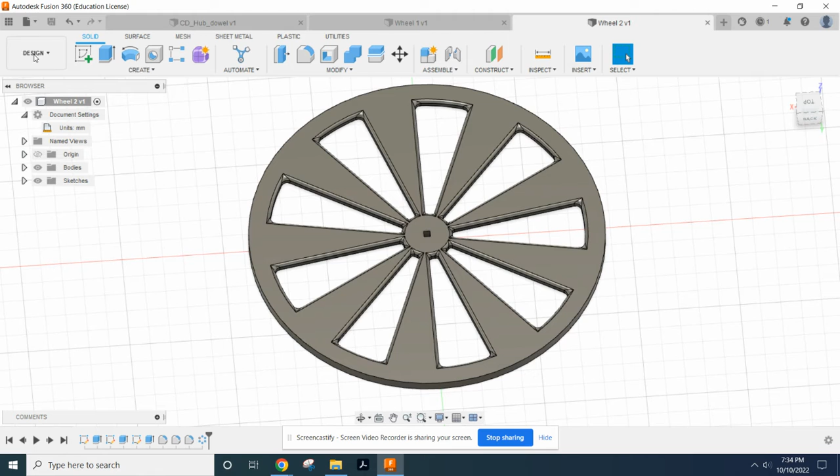Let's go ahead and start this thing. I'm going to go File, New Design to create a new design. It will still be adding these things in my POE folder. You can see I've made a couple of attempts there, even made a screencast before I found out I didn't have the sound on. It's been a good day.

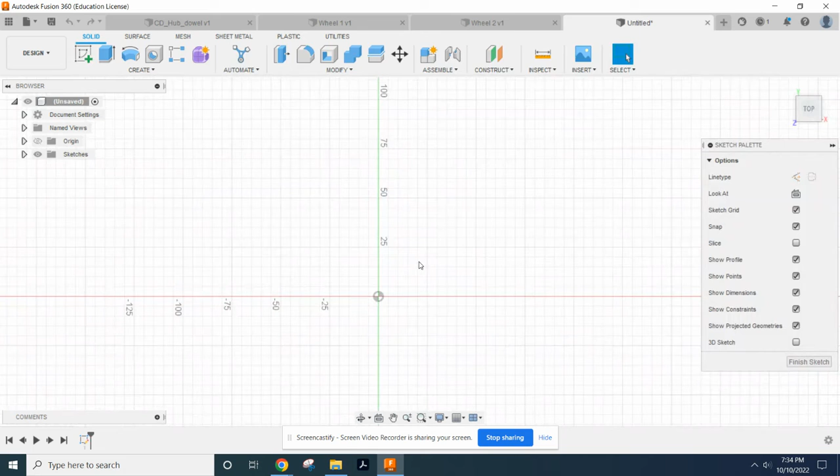So I'm going to start a new sketch. Click on that XY plane because I'm happy and comfortable in my XY land. And I'm going to select that circle because I want a round wheel. I'm not very creative like that.

I want my round wheel to be ish 175 millimeters across. Now make sure you are working in millimeters - you can come up here to this little tab and make sure your units are millimeters. Otherwise it will not be dimensionally accurate on my 3D printers.

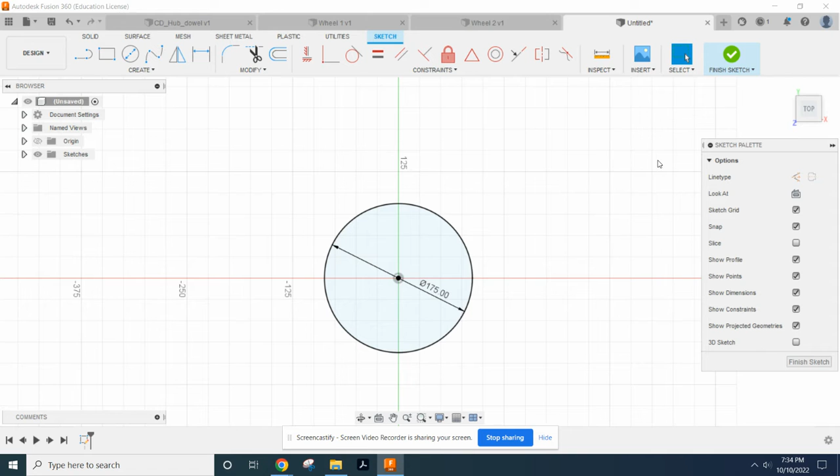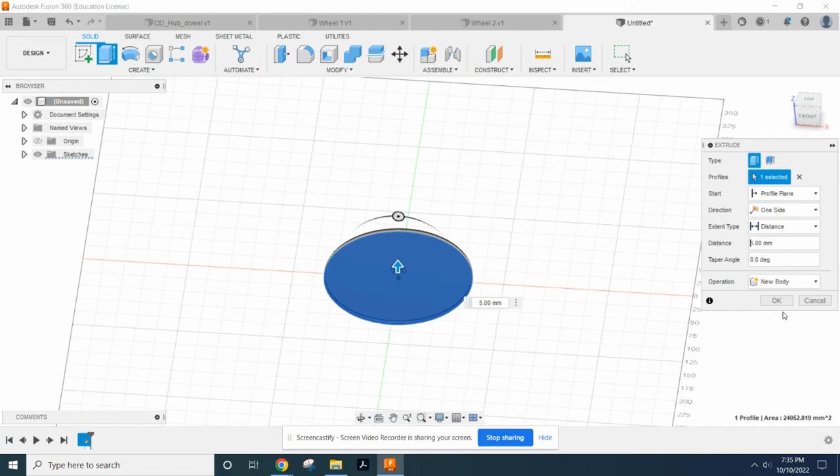I'm going to finish the sketch and then come up here to the extrude button. I'm going to select that sketch to extrude, and yeah, that one. Pull the arrow up a skosh - I don't want it to be 25, I want it to be like 5. Creating a new body, I like it. Let's do this. All right, so that's boring.

You got a disc, congratulations. All right, so now we're going to create a new sketch here, and this is where we're going to have our axle hole going through.

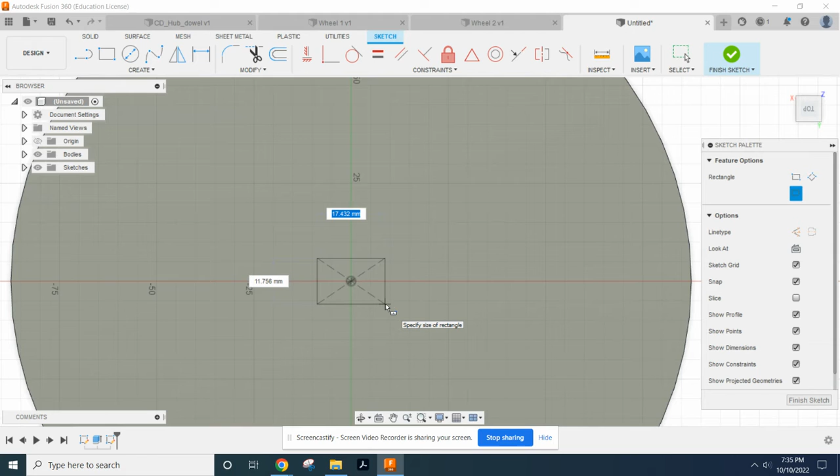So for this one, I'm going to create a square axle that will fit our VEX components. I did that center rectangle right there - yeah, that one. So what I can do is select the origin again, that center point, and now I'm going to type in 0.127 inches. I'm picking that number because the VEX parts are 1/8 of an inch by 1/8 of an inch, which is 125. I want to make sure I can get the thing through there, and a little bit of hot glue will definitely hold it in place.

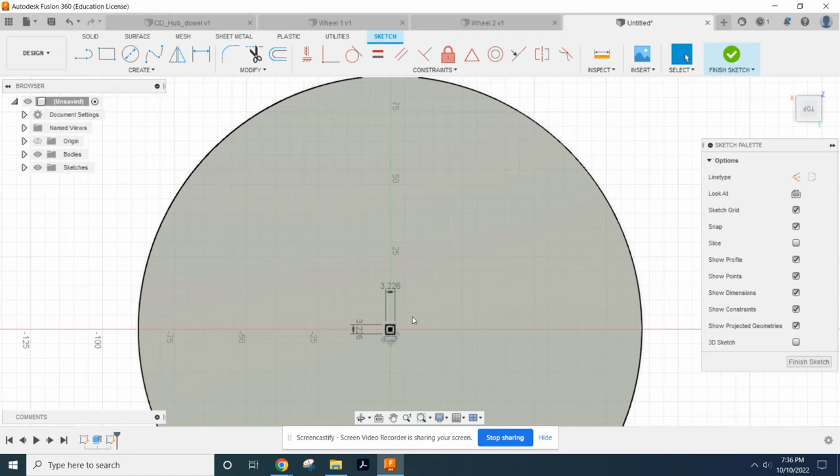So then I'm going to hit tab and type 0.127 inches again. It's going to recognize that I want 0.127 inches, but it will happily convert that to millimeters for me since we're working in millimeters. I'm going to finish the sketch and then extrude that hole again.

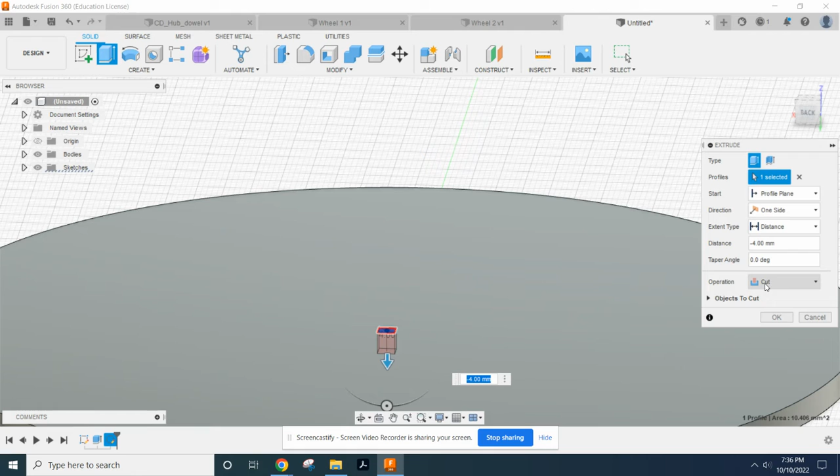So you got to be careful what you're clicking on. Over here, the disk is highlighted, now the hole is highlighted, that square that I want. It's easiest if I hold shift and use your center mouse, and you can see as I take it up, this little arrow thing - if I pull that down, it sets this to cut. Instead of extending it for a distance, I want it to be all the way through the object. That way, regardless of how thick I make this object, if I come back later and change that, that hole will always go all the way through it.

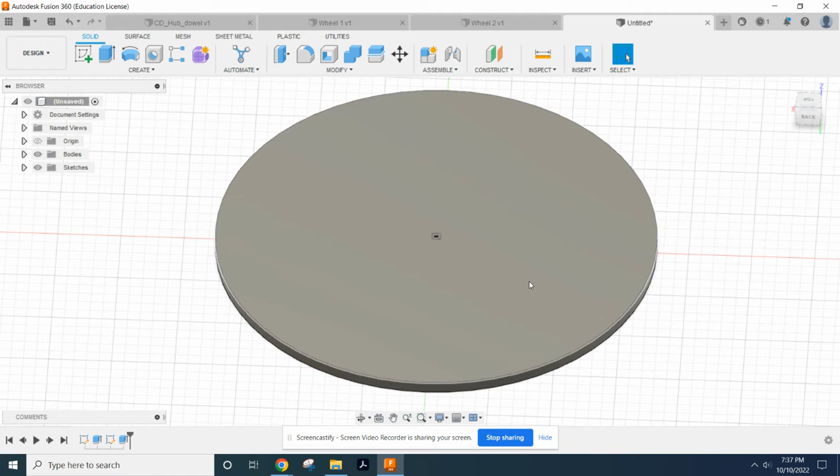Okay, happy days. Now what I want to do is put like a pattern going around this thing that is actually going to be like the spokes of my wheels. So I need to figure out what kind of cutouts I want. First thing I'm going to do is set up an outside perimeter.

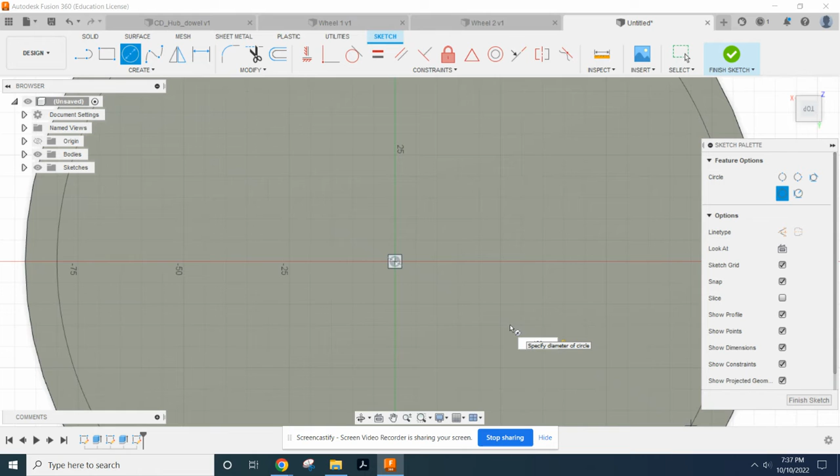Picked my circle, selecting the origin of this thing again. And what did I say, 175? I want to go 160 millimeters. So that means I'm going to have a 15 millimeter rim around the outside. Cool, got it. Now on the inner circle, I want that to be, we'll go with 25 millimeters. Cool, now I got that.

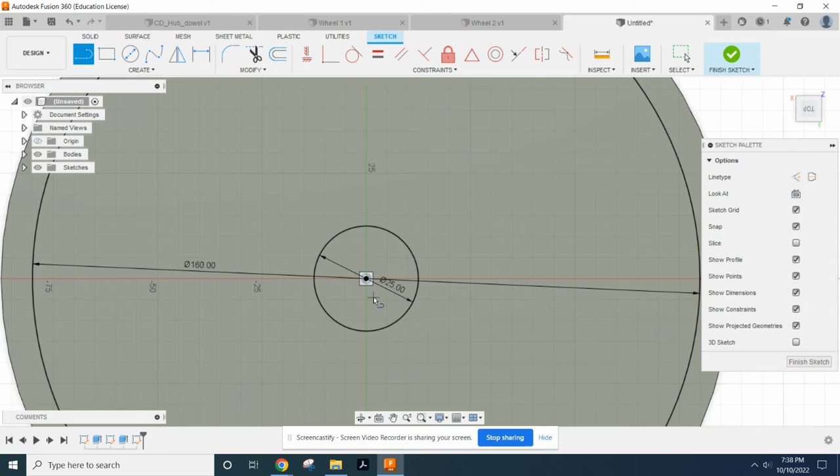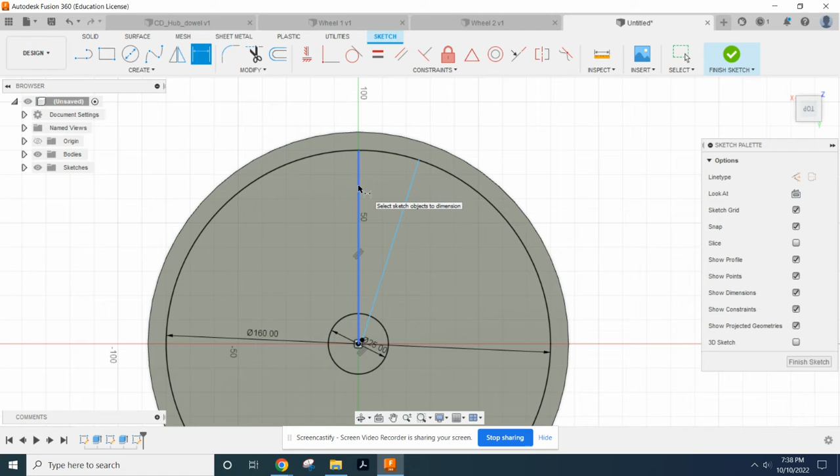Now what I want to do is come up here and get my line tool. I want to come clicking from the origin, go straight up, and click right there. Okay, I want to do that again, coming over here, and make sure I'm clicking when I get that little blue X there. Now, what I want to do is dimension the arc, the distance between those two.

I'm going to go ahead and I want it to be a 20-degree angle. You can put it at 15, 20 - I just recommend you make sure it divides into 360 degrees evenly, because we're going to put an array or a circular pattern around that thing.

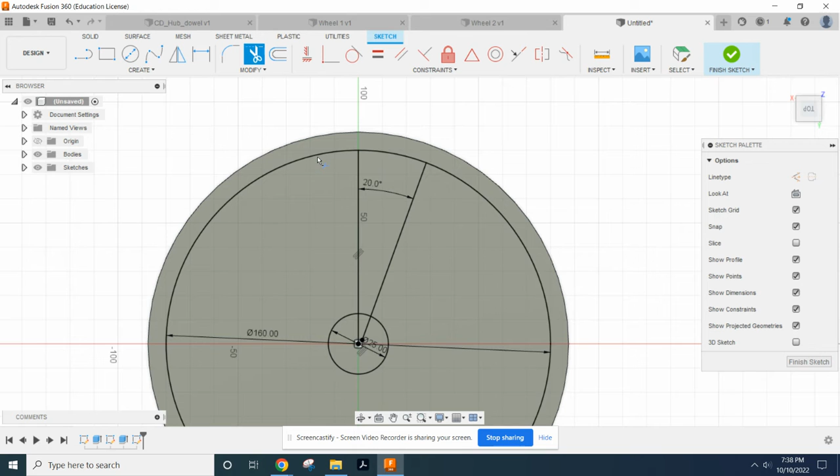I now want to modify this because I don't want this outer part of the circle. I don't need all of these lines in their full extent. So I'm just going to start clipping away and cutting away lines I don't need and don't want. Okay, so now I'm left with this shape, right?

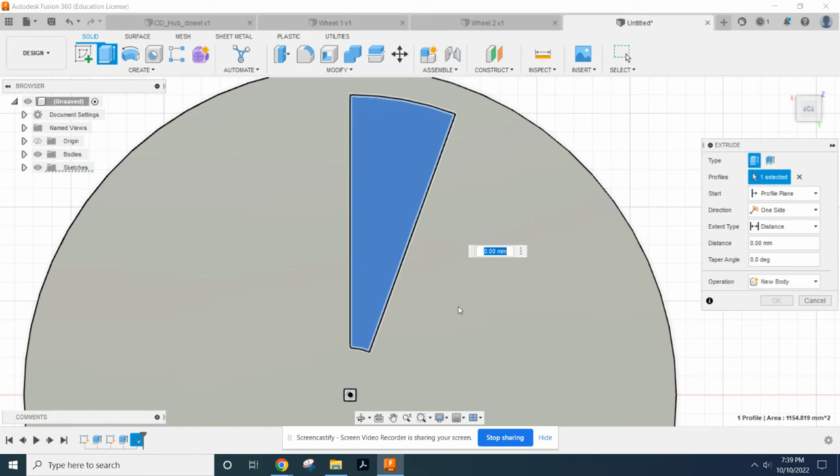Now I want to go ahead and extrude that. So I'm going to hit E and select that shape. Now, if you cannot select your shape, that means you did not make a closed shape, and you need to make sure your lines are actually intersecting where you think they are. But I'm going to go ahead and extrude that, and again, I'm going to cut that thing all the way through. Okay, looks good to me.

Let's do it. All right, now that's my original, right?

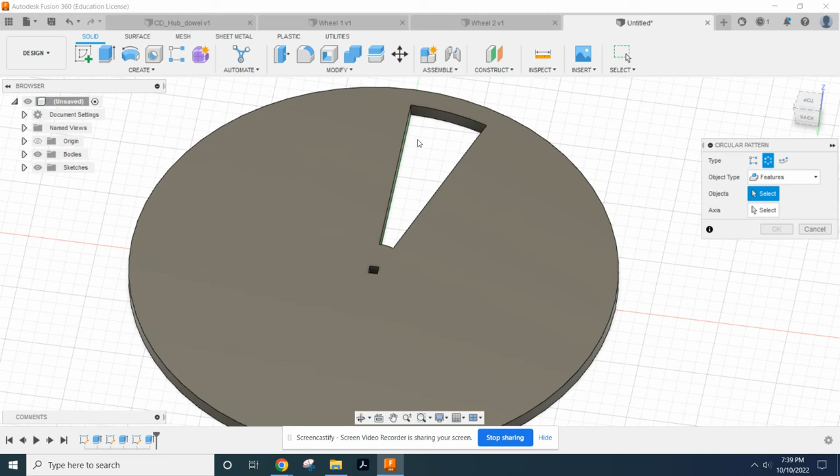So we're going to go ahead and make a pattern now, specifically a circular pattern. I want a circular pattern of a feature. We don't want a body because that would be the whole body, and we don't need a face because that would be just the face. I want the feature, and I want to make sure I'm carefully selecting the feature.

Now you got to select your axis. I select the axis of the whole disk, and immediately I get this preview. I can change the number of holes that are cut very easily. So let's see, 360 divides by 20, 18 times, so like 7 or 8. Yeah, I'll go with 9 holes, that should be good. And I'm going to click OK.

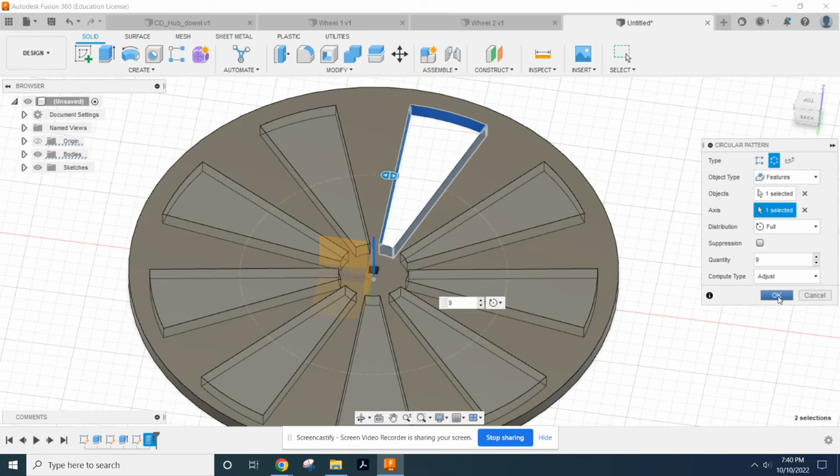And now I get that shape, which looks fairly decent. They're all spread around evenly. But then if you've ever 3D printed, you know that a 90-degree angle is a nice sharp angle, right?

So what I want to do is adjust my original one. You see how I just hovered over on my timeline to find the original feature? I'm going to modify this feature, so I'll click here and click fillet. I'm going to click all of the lines that represent the intersection of the sides of the hole and the top and bottom of it. So I'm just selecting, and then when I want to turn the thing, I'm holding shift and the center mouse button and dragging it around to get a good view of what I want to click on.

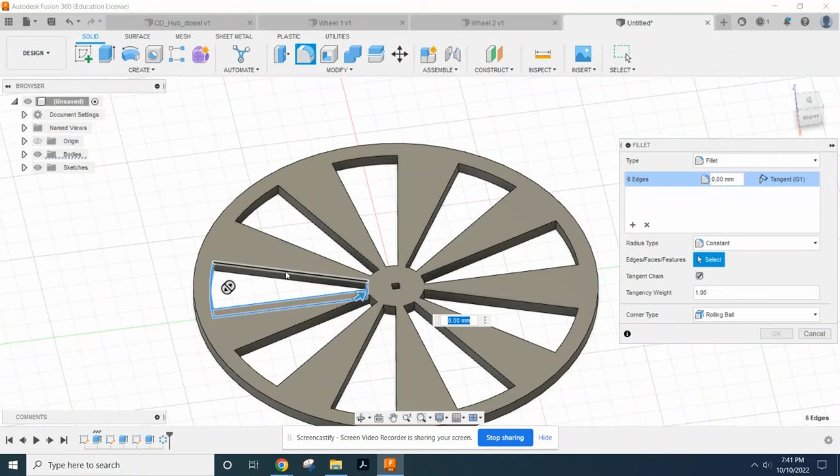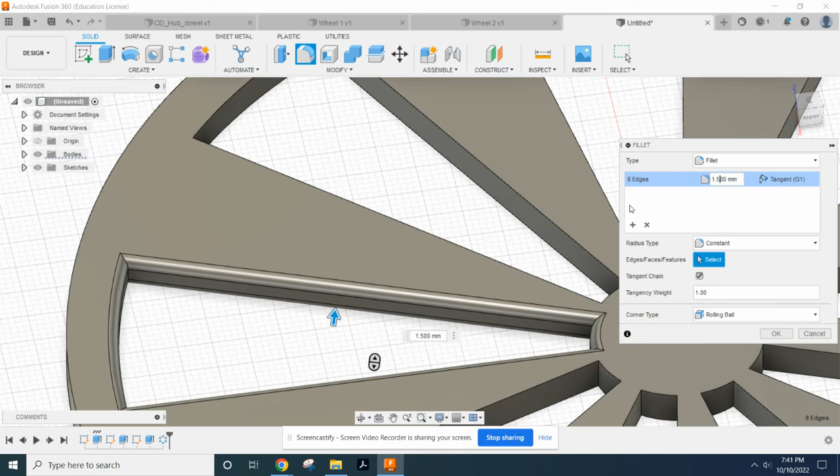Okay, so now I'm going to select a 2mm die fillet. Yeah, that looks good, that looks all right. Maybe I'll take it down to 1mm, maybe that'll look better. That's not bad. How about 1.5? There we go. That is gorgeous. You can pick whatever fillet size you want.

Whatever looks nice, until it pops up with error messages. And it will pop up with error messages.

So I also want to do these edges. That one, pan around by holding shift and the center mouse. And that one. Now I'm going to say let's do a 3mm. Looks great. Maybe we'll do a 4mm. Ooh, see how it says no? Go back to 3. All right, cool.

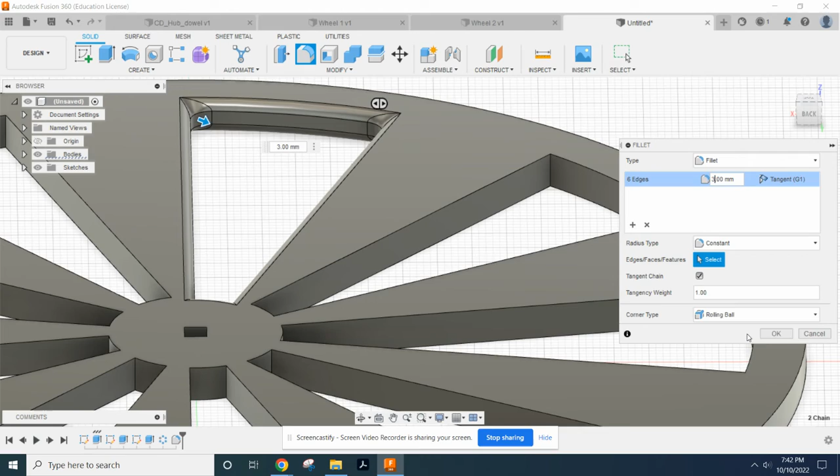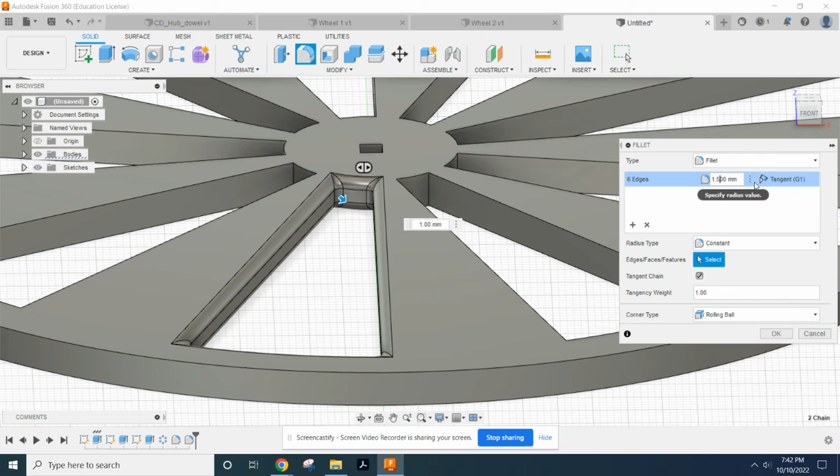And now I'm going to do this inner one. All right, fillet that thing again. Select, hold shift, center mouse button, click that one again with my right click. Now I want to go ahead and figure out what looks nice there. 1mm, 1.5mm, I like that 1.5. Click OK.

All right, so here's the thing. That only did it to that one, right? I want it to go to the rest of them. This is what this timeline is really good for down here. I want to go ahead and select that pattern and drag it over here. Okay, so all of my fillets have now occurred before the pattern.

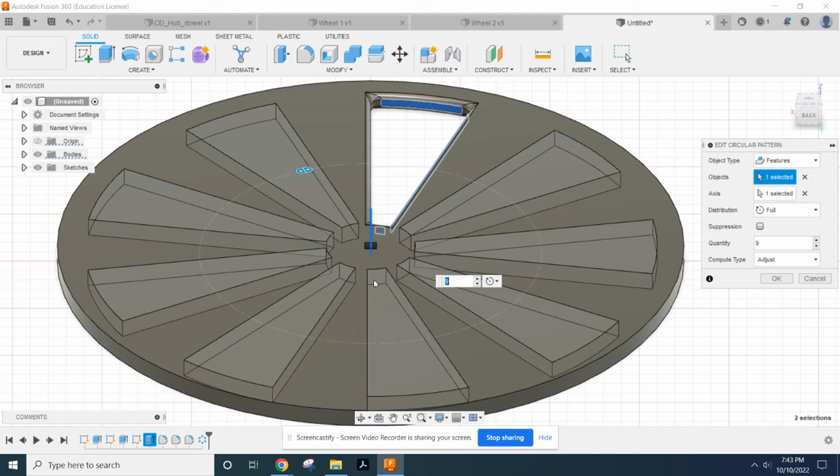And so then I'm going to right click on this pattern and say edit circular pattern. Then I'm going to hold control and select here, here, and here. And you see how it changed the preview? Because now instead of having one object selected, I selected 4. And now I can click OK.

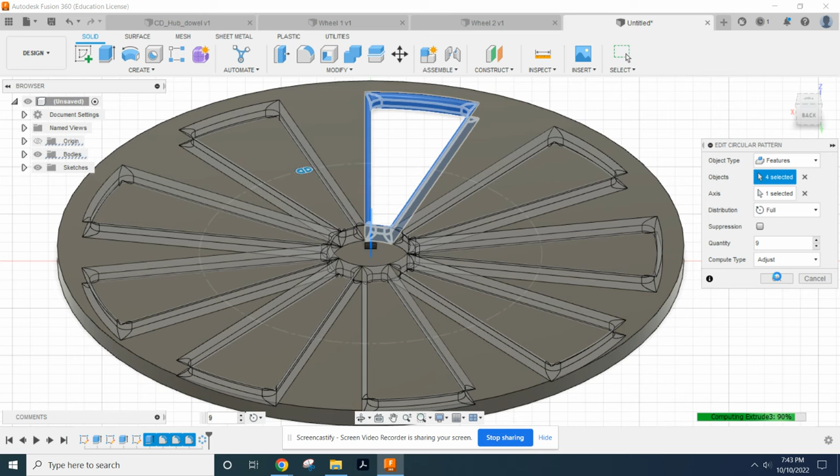And drum roll please, let's let it think. Compute, compute, compute. Yahoo! It popped up with an error message, but it also did it. Let's see what this error message is. Edit. Maybe we should cut this down to 8. 8 might work better.

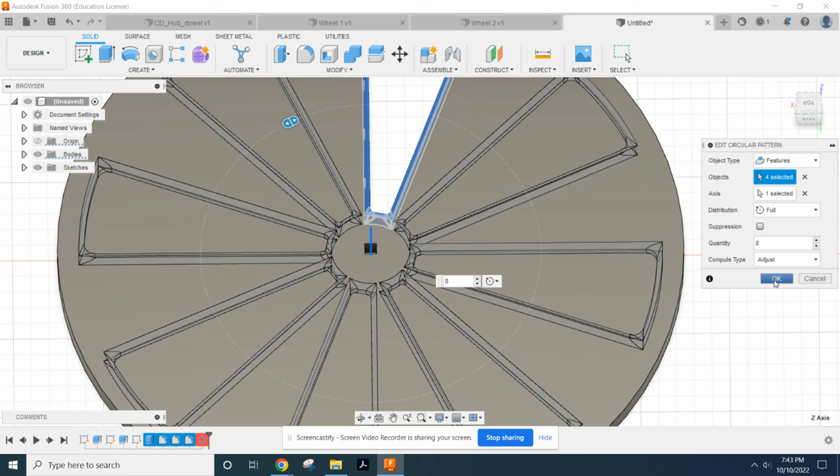Yeah, if it's popping up with error messages, it means there's something physically wrong in actually creating your object. So there's a good chance that if you actually go through and ignore it, it might not work for 3D printing. So, speaking of which, ooh, that looks neat, the way you can look down one and it goes right up the other side. Yeah, that's cool, added bonus.

All right, so that's my wheel, right? I think it'll work. I think I want an STL of it.

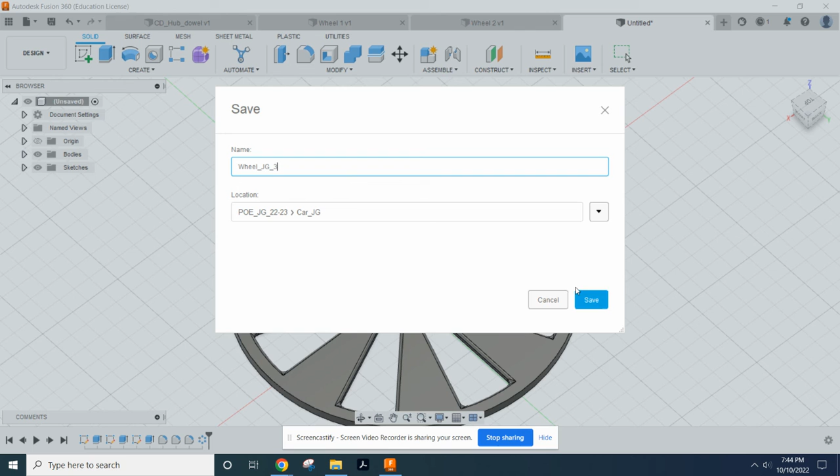So what I need to now do is file, save, and you should call that something creative, something memorable, something you won't forget, such as wheel underscore your initials underscore a number, such as number one if that's your first version. Then click save, and it's going to pop up with that name. Now we want to go file, export, and make sure you're exporting as an STL file.

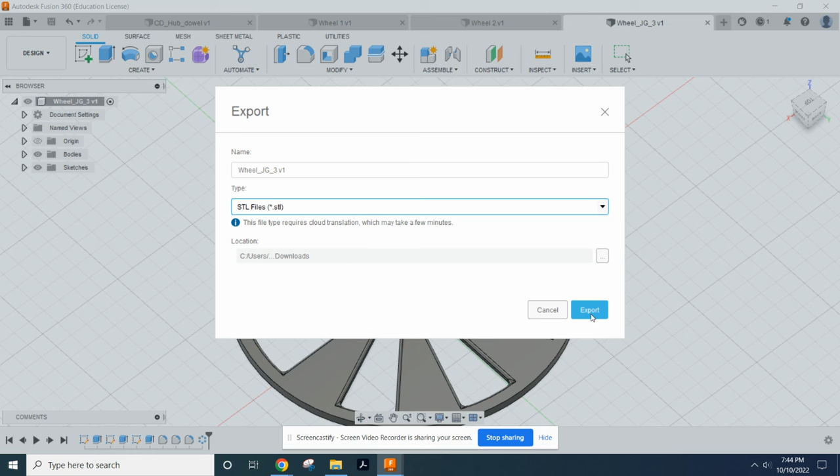That's stereolithograph for those that care. That file I can 3D print. And looking at this location where it says C users downloads, that tells us where it's going to spit that file back into our computer. Since Fusion has to use the cloud in order to do that, it's going to go ahead, communicate with the servers elsewhere, get us our file, and send it back to us. It's going to automatically download, and it'll give us a nice little message when it's done.

Okay, so you can continue working while that's working. Any changes that you make to it now are not going to be reflected in that STL. You'll have to make another STL, and you'll have to upload that STL to me in order to 3D print it. All right, so hopefully this is helpful.

Hey, look at that, Show in Explorer. And boom, there it is, right there in my downloads folder. So that's where it showed up for mine. Hopefully that's where it'll show up for yours.